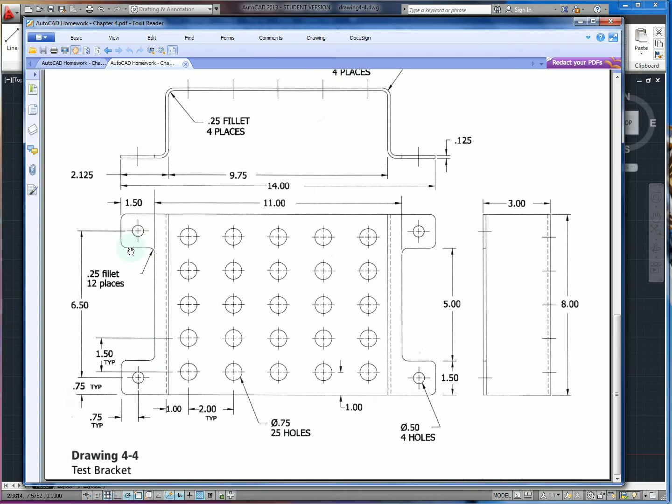Okay, so we want to fillet all of the corners, and that is a radius of 0.25 in a bunch of different places. So we're going to start by setting our radius to 0.25, get M for multiple, then go through and, sorry, I'm going to set trim to, we will continue filleting these inside edges.

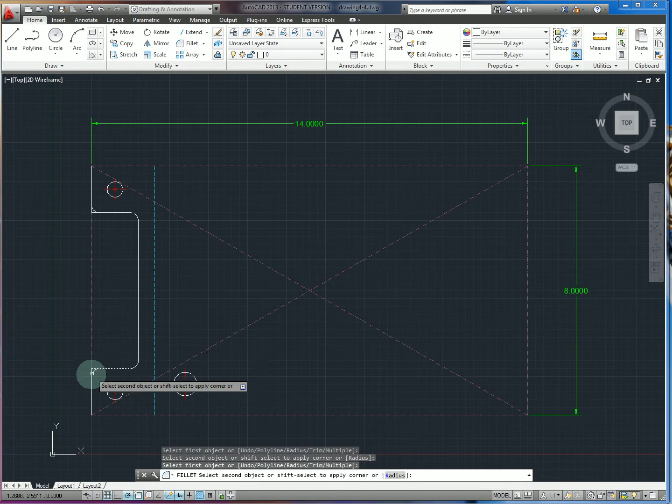Now, this happened here because I had fillet set to no trim mode, which is useful if you need to connect two dissimilar lines, but you don't want to have that line be overridden. So for example, let's say this line was a hidden line. If I do a fillet on here right now, to connect the two, maybe I don't want this to be hidden line here. So it has to assume it's going to take one or the other.

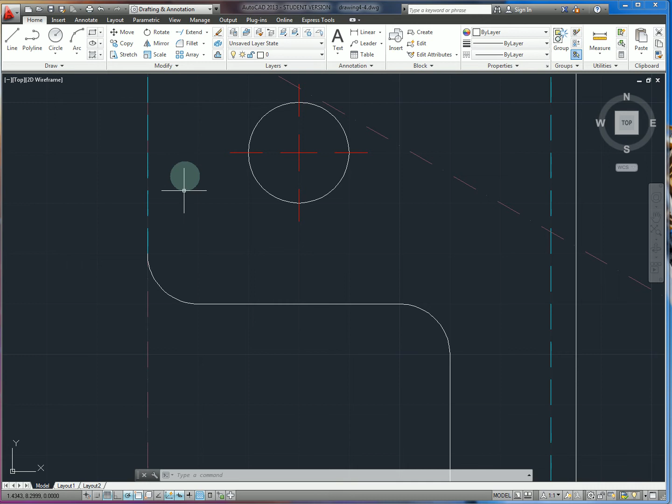So if I leave trim off, then it preserves the original lines, and then I can manually cut away the ones that I want. So anyway, that aside, we're going to undo that, and then a quick fillet. And now we have these inside curves.

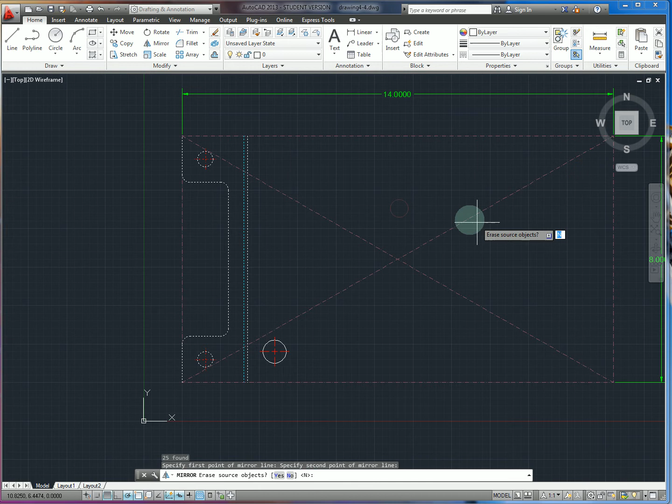And so finally, we're ready to do this mirror. And I want to select again this midpoint, go up like so. Now I've got these outlines here. So I'm going to connect the outer lines. Be careful to connect, not to my dimensions here. And now I have most of the outer shape. We'll notice we still need to include 4 more fillets.

So this is easy to do if we just do that now. And you could, if you use the no trim mode of fillet, actually do that with reference geometry, and it would create this edge without deleting anything. And then you just have to decide, is it worth trimming everything away or not.

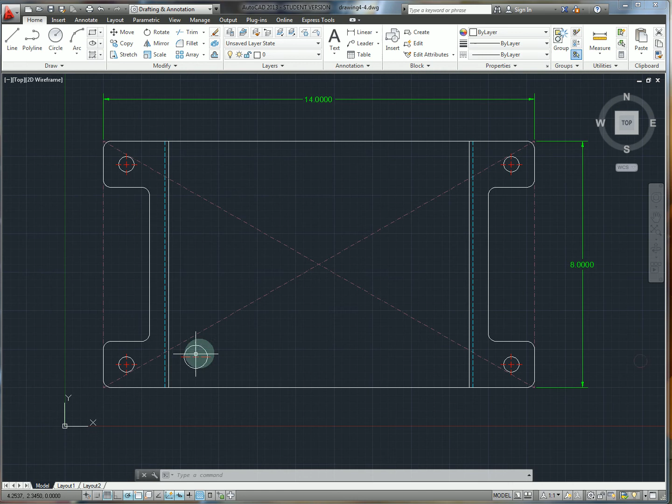Okay, so the last part of this first view is just to do this pattern. We'll see I've already got the shape with the center mark, and so I'm just going to type array. We want rectangular, and now we can use these grips here to get the approximate number that we want. And then we'll just consult back to our drawing here.

So we're looking for a pattern of 1, 2, 3, 4, 5 by 1, 2, 3, 4, 5 with a spacing of 2 horizontally and 1.5 vertically. So here we can manually make that spacing 2. I can click the grip to get rid of that extra one, manually make that spacing 1.5, and then we're done.